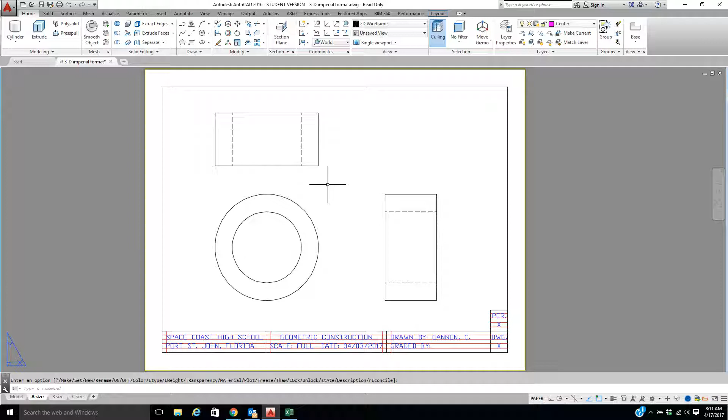Okay, we're going to go ahead and do this quick little video on how to put actual center lines on your 3D drawings. This is just a demo, so I don't have the complete drawing, just one that represents circles, so we have holes and we need center lines. Notice I've already got the drawing pretty centered up, with the spacing basically even all the way around.

So in order to do our center lines, when you're doing 3D, you'll have to do them in paper space. We're using an A-size drawing here. This would normally say Layout 1, but this is paper space. We don't do it in model space. Now we're in the center layer, and yes, my center layer is a different color than normal. I did that so you can actually see it.

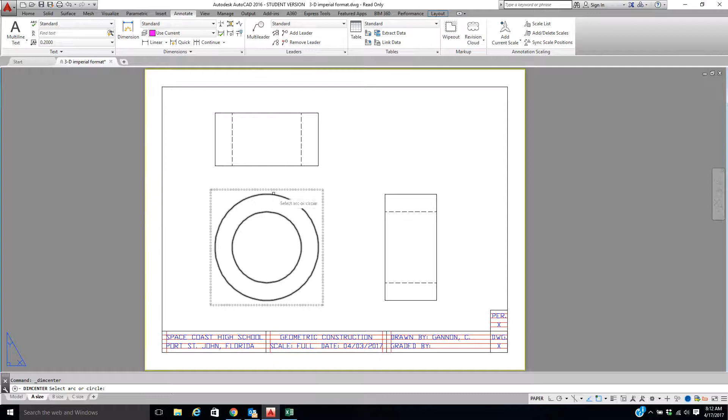The first thing we want to do is come to our Annotate tab, come down to where it says Dimensions, hold it down, and go to our center mark. Now with that, I'm just going to pick the circle, and notice it put the center mark right here. Now let's let the computer do the work for us.

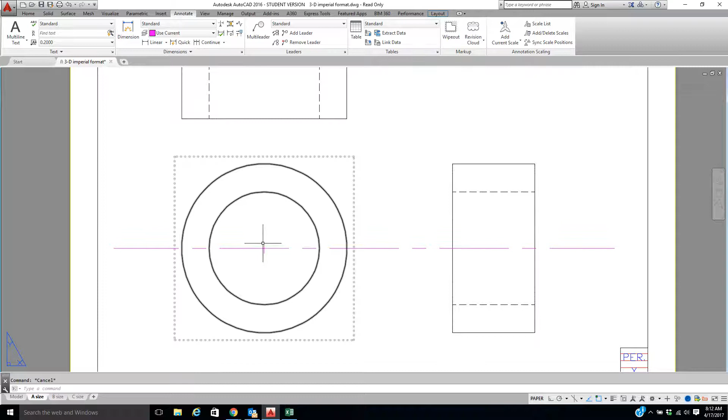What you do now, if we had multiple circles, you would put the center mark on each. We're going to pick this center mark here and drag it straight across, going way past the edge on both sides. I'm going to pick this one and bring it up all the way - notice I should have my ortho on here - and bring it down past here.

Now did you notice how I pulled these out? I didn't add to them. I want these to be one continual line so we get the proper spacing. So that's all fine and well.

Now remember in the past we offset for our drawings because our drawings are pretty small - we go about a quarter of an inch outside, then we do our trimming. I told you a quarter to a half inch, just make it even. So you can't just offset this edge - there's nothing, because these are actual pictures.

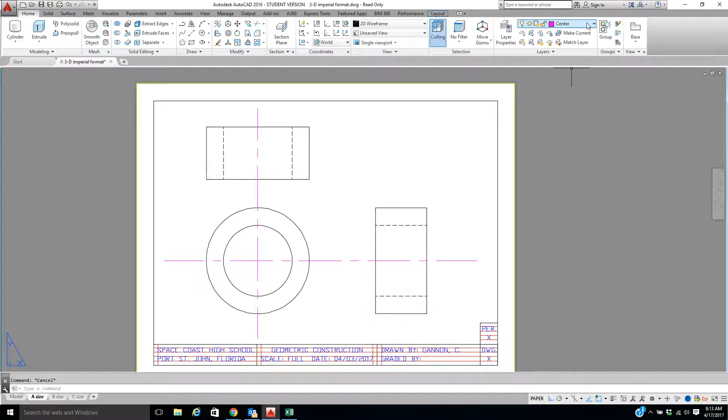So we're going to come up here and go to our center or zero layer, and we're going to put what I call dummy lines. I'm just going to come on here because zero layer doesn't print. I'm going to come from here to this intersection here. Let me do this right to there - oops.

It's not snapping - it's snapping me way out there. Let me go ahead and do a diameter of 3, since I know the size of this one. So now I have that.

I'm going to come in here with my line, just grabbing here and drawing some dummy lines. I don't care which direction I go - see, I have the red tail sticking out in both areas. So I'm going through here. Sorry about that, I should have had that turned off.

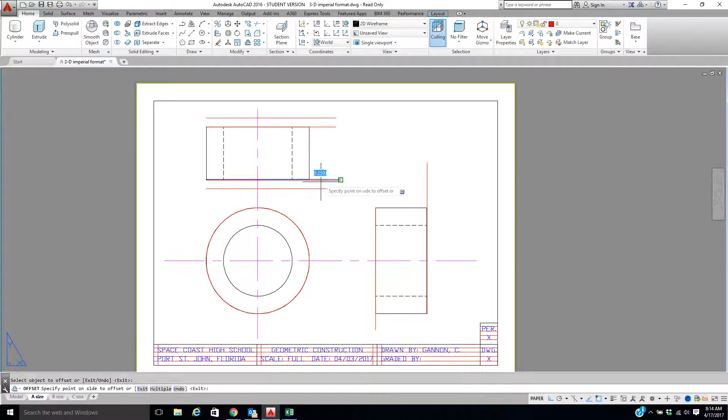There we go, so these dummy lines are going to come in handy now. I'm going to do my offset, 0.25. So with this, I'm going above, below, outside, outside, outside. All I have to do now is just trim.

Okay, sorry for all these interruptions - this is a Monday after spring break and things are crazy. So I'm going to trim here, trim here, trim here, here, here, and here.

All right, so now we have our center lines. Let's take a closer look at a few things. Let's come over here to our layer properties. Now that I've seen what's going on, I'm going to freeze this off so you can actually see what the actual lines look like, if that would help. Let's freeze that one off.

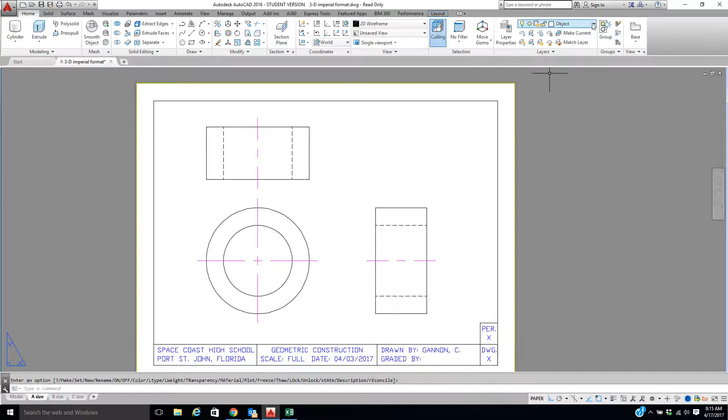Now let me just change one thing quickly. Normally I'd be doing my actual layer states, but for this demo I just want you to see how we have this set up - we have our center lines, the ones on the side, and yes this does represent the direction here. What you really need to look at is to say, does this actually look good?

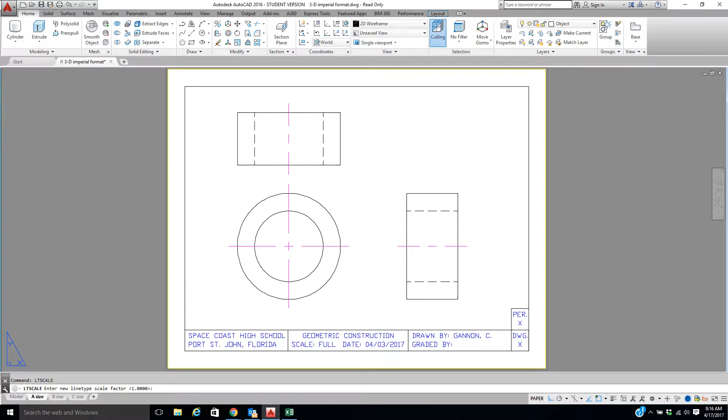Remember LT scale - let's type in LT scale and watch the difference. Right now it's at 1. Let's type in 0.5. Okay, check out what it looks like now - this is awful tiny, look how small these areas are here. Let's see what we can do with the LT scale again. Let's try 0.75 - that actually looks pretty decent.

Notice you've got enough hidden lines - they're about an eighth of an inch right here. You've got a good center line showing, a good center line showing here, and you've got your hidden lines there. That's basically all there is to it. Just remember, adjust that LT scale before you print - that is a huge thing.

But just remember, always put your center marks in the circles. And if you had two circles side by side, you would end up taking and making one continual line across - you would probably delete out the other smaller piece. So that's what we should have for right now.